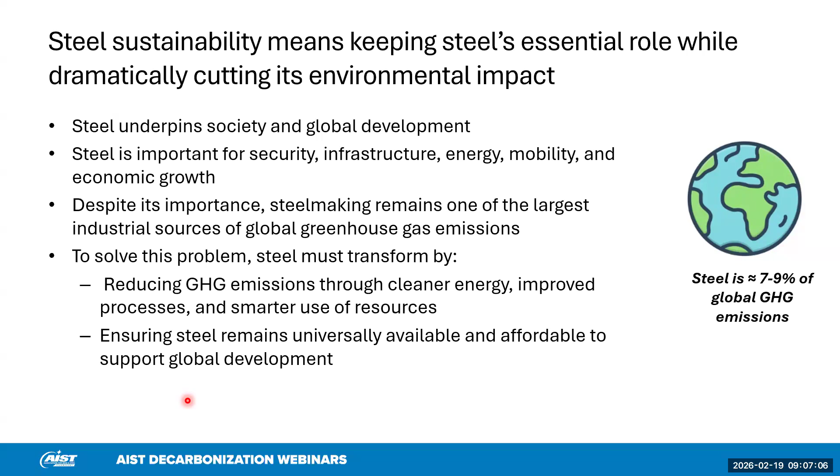So I want to talk just real quick about why steel is foundational. It's for national security—not only for tanks and ships and guns, but all the things that go into national security. It also underpins our entire infrastructure in each and every country.

Bridges, rail systems, and everything that puts things together. It's important for how we get from one place to another, how we ship goods—automotive, trucking, rail logistics, and shipping. None of this could be done without steel.

Steel is also energy. This entire energy transition to try to reduce greenhouse gas emissions is going to be rooted in steel—the foundations, the towers, the piping. Think about all these things going into these projects; it's all rooted in steel.

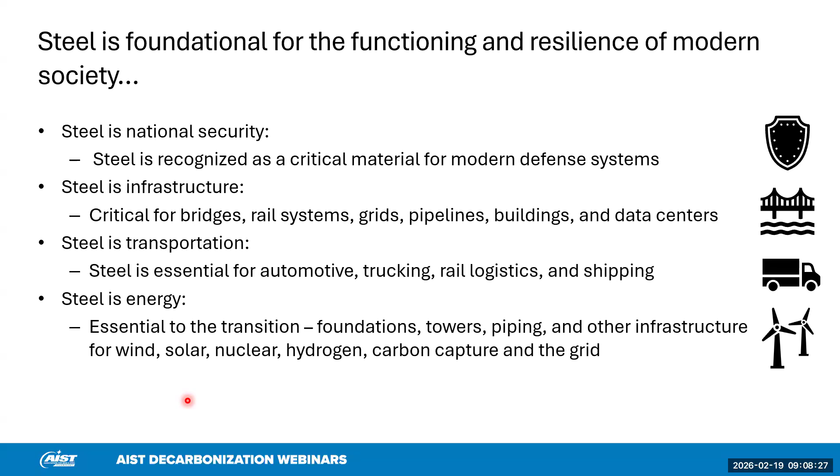And so, yes, we have made progress in reducing greenhouse gas emissions. You can see here, back in 1960 we were at 2.4 tons of CO2 per ton of steel, and we're now all the way down to a little over 1.90.

Some of this was done through sheer economics. Steel scrap became plentiful as our society started recycling, tearing things down, and reusing things. The advent of the EAF really helped drive a lot of this efficiency, and blast furnace and other processes have also become more efficient.

At the same time we improved our greenhouse gas efficiency, the use of steel has actually increased. So now our total emissions have increased dramatically with the usage of steel. The end result is that changing steel efficiency is not enough—we have to dramatically change it.

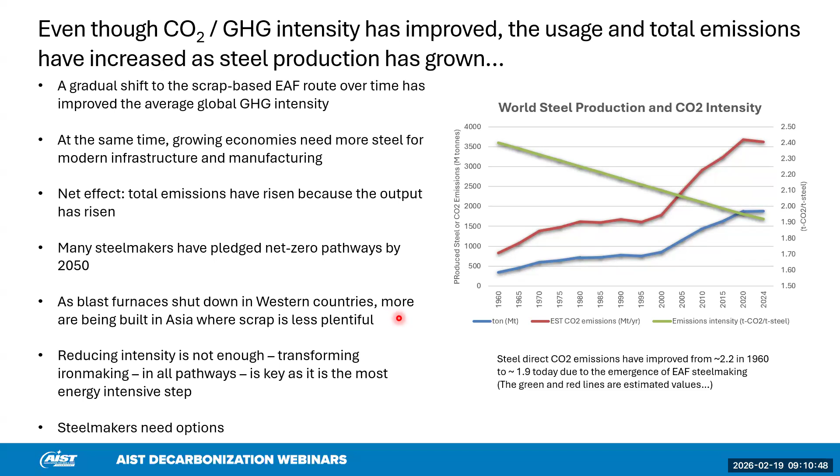Right now, not everybody can go to electricity. As blast furnaces are shut down in Western countries, we're trying to lean on electricity as a potential source of making clean steel. But not all places are able to do that. In Asia, for instance, they rely heavily on coal and scrap is a lot less plentiful there, so they're still building blast furnaces. Steelmakers need options, but we don't need mandates.

Talking again about steel recycling, it's nearly 100% recyclable. You can use a steel beam over and over again, just remelt it and remake it. The fact that steel is magnetic makes it super easy to separate, improving recovery and lowering landfill. In North America, I was really surprised to see we have over an 80% recycling rate—one of the highest of any material. When you recycle steel, you save approximately 74% energy and about 60% of the greenhouse gas emissions.

While recycling is super important, the world still needs clean, high-purity iron units, or we won't be able to make some of the high-quality steels that we want to make.

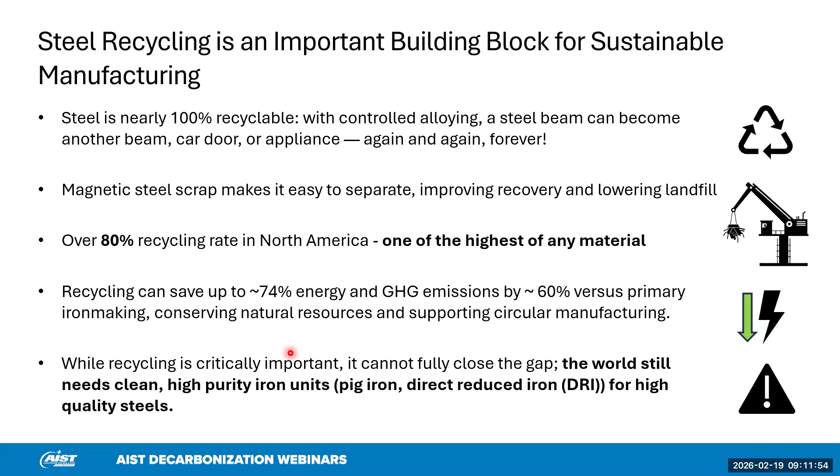Okay, I'm going to transition to the next group and talk about DRI and blast furnaces. These are the two biggest forms of iron making that I mentioned are so critical to reducing the greenhouse gas emissions of steel.

DRI positives: they're typically alloy-free and make efficient use of top gas, much more than iron making. It's 33% lower greenhouse gas when made with natural gas, and you can almost get to zero with hydrogen, especially if renewables are used—and you can export it since it's already in solid form. Although it generally retains oxides, it's harder to melt in the EAF, and it's more expensive without low-priced fuel, so they really rely on that.

Blast furnaces are alloy-free, typically less expensive, easier to melt in solid form, and they automatically remove the gangue, which is an important point. It's hard to export because you need to solidify the iron, and it's generally more capital intensive—so integrated steelmakers have a lot of equipment already on the ground. The big negative is it's higher in greenhouse gas intensity.

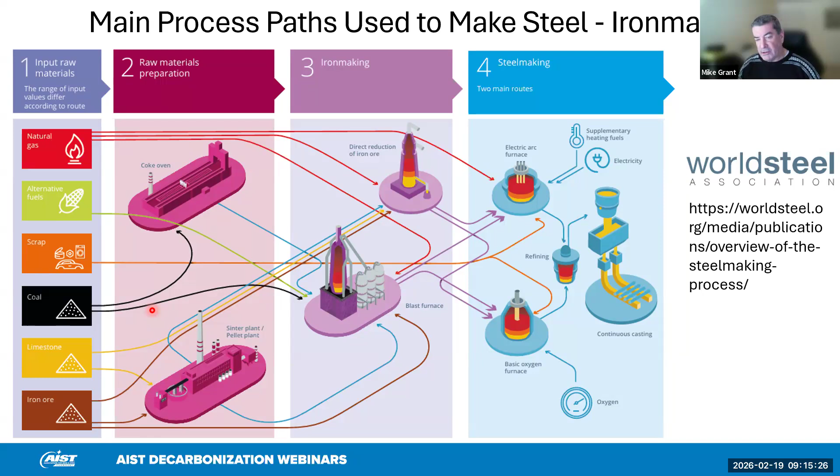I'm going to break this presentation into two forms. I'm going to talk about iron making and give you some background on the way steel is made, as best I can do in 15 minutes. And I'm going to start with iron making.

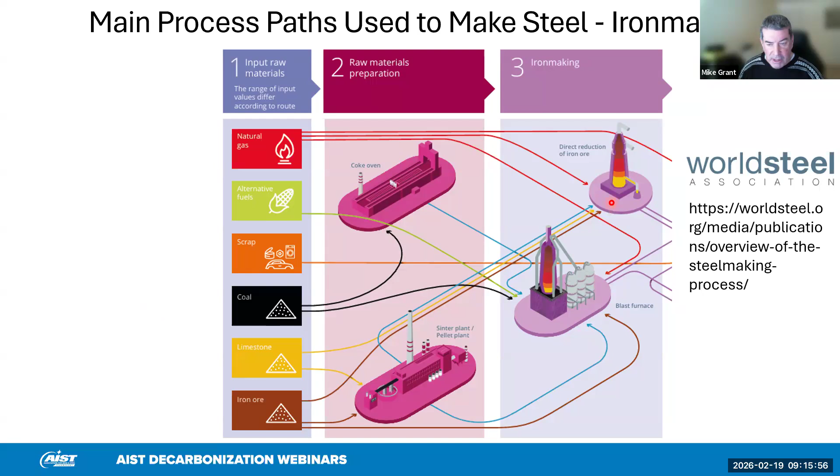Iron making is basically the blast furnace, which is the classical method. It's been made for centuries with a blast furnace. And more recently, direct reduced iron, which is a natural gas based process. Joe introduced those earlier.

So first of all, let's look at the growth of steel production in the world. Up until about 2000, the world produced less than 1 billion tons, around 800 million. Most of that was made with the classical blast furnace, basic oxygen furnace processes.

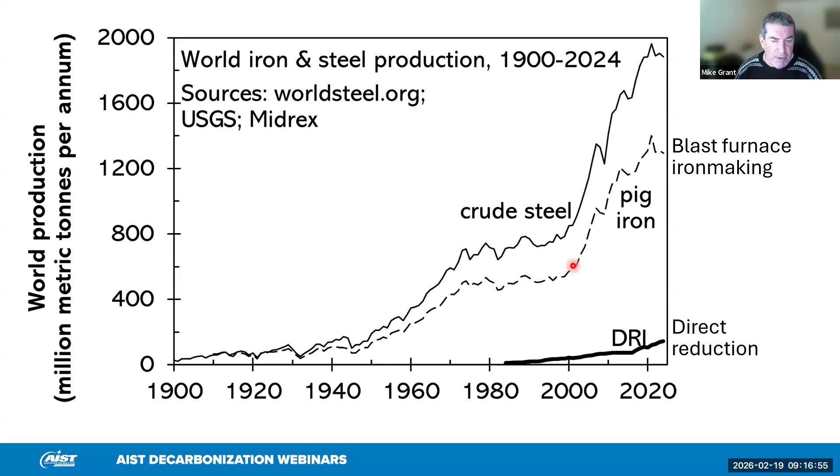In about 1980, a new process was developed, direct reduced iron, primarily gas-based, natural gas-based process. This started to grow because it provided an alternative to steel making in countries where natural gas is relatively inexpensive. But starting around 2000, we saw exponential growth in steel making. Primarily, even though these are the two most emitting processes, the growth was primarily in the blast furnace BOF process.

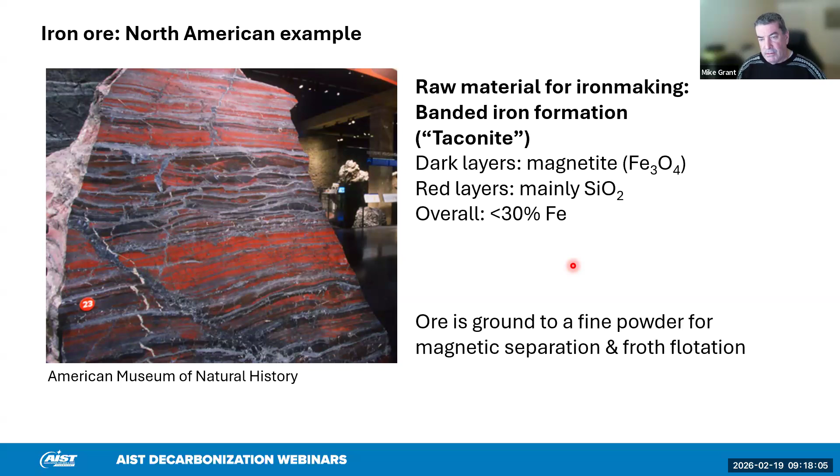Overall, it's about 30% iron content, and we liberate this iron ore by grinding it really fine. By grinding it to very fine particles, we can separate the silicon oxide from the magnetite using magnetic separation. The magnetite is actually magnetic, so it can be picked up with a magnet. And then there are other forms of separation, like froth flotation, a liquid way to separate the different minerals.

If we look at the flow sheet for taconite ore processing, we have grinding and flotation. We separate the valuable magnetite material as best we can. To do this, we have to grind it very fine, around 50 microns. And this, of course, is not suitable for the process.

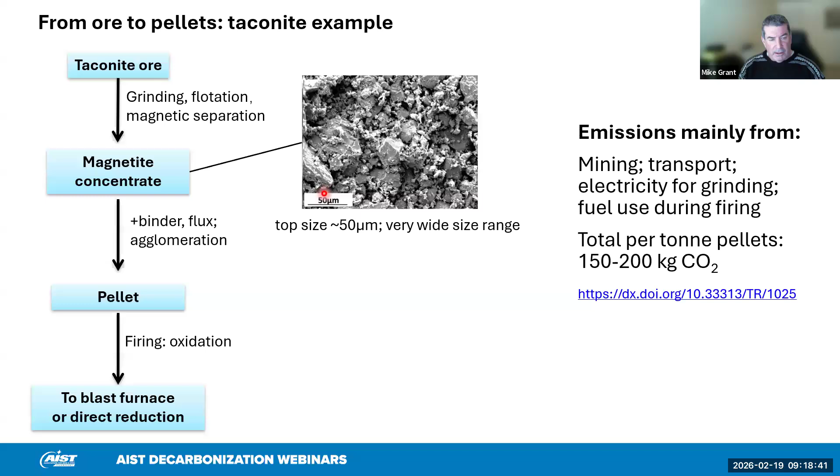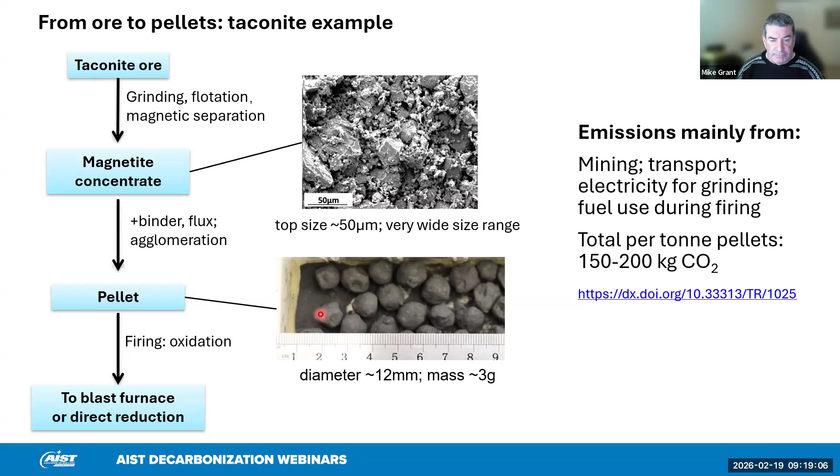So we have to then agglomerate it again. We add a binder, typically a type of clay. We pack it together in little balls, and these become sinter or pellets, as you can see pellets in the photograph here. We need to do this because we need to be able to pass a lot of reducing gas through these particles in the blast furnace or the DRI reactor in order to make the process function.

With these two processes, we can divide the types of CO2 emissions that we're concerned about. Probably you all know these already, but I'll highlight them quickly. Scope 1 are the CO2 emissions directly emitted from the process we're working with - the blast furnace, what comes out the stack, or what comes out the stack of the DRI reactor. Scope 2, if the process consumes electricity, and that electricity is made by burning fossil fuels, that electricity is a source of CO2. We need to add that to Scope 1 emissions to characterize our overall impact on CO2 emissions for the steel process.

Then there are Scope 3 emissions, less clear, but an example would be the emissions created upstream in producing, for example, iron ore pellets or producing coke, assuming that coke is not produced at the steel mill site itself.

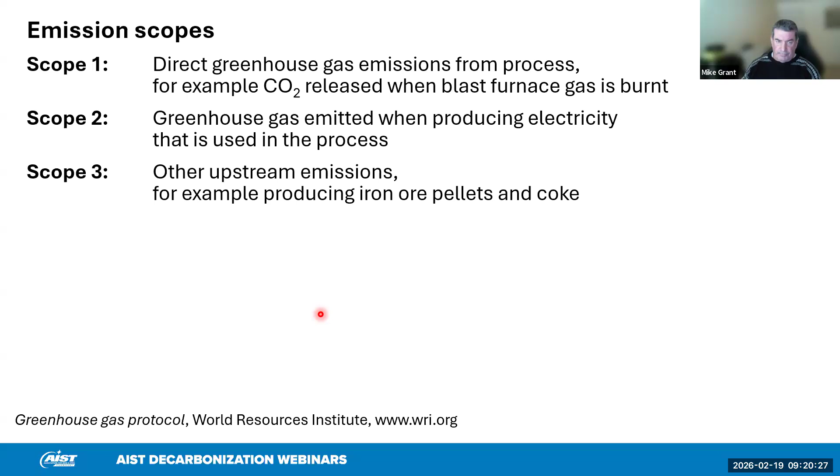This is a basic diagram of a blast furnace. We charge about 1,600 kilograms of pellets, iron ore pellets or sinter, into the top of the furnace, along with some flux to make a slag and about 450 kilograms of coke. These form a packed bed in which we blow gas from the bottom - hot air about 1,300 kilograms and some oxygen, typically averaging about 40 normal cubic meters of oxygen per ton of iron. We blow these in, it burns coke at the bottom, makes carbon monoxide. This carbon monoxide reacts with the iron oxide pellets to produce metallic iron.

The energy consumption of the overall blast furnace process is about 3.6 megawatt hours per ton of hot metal.

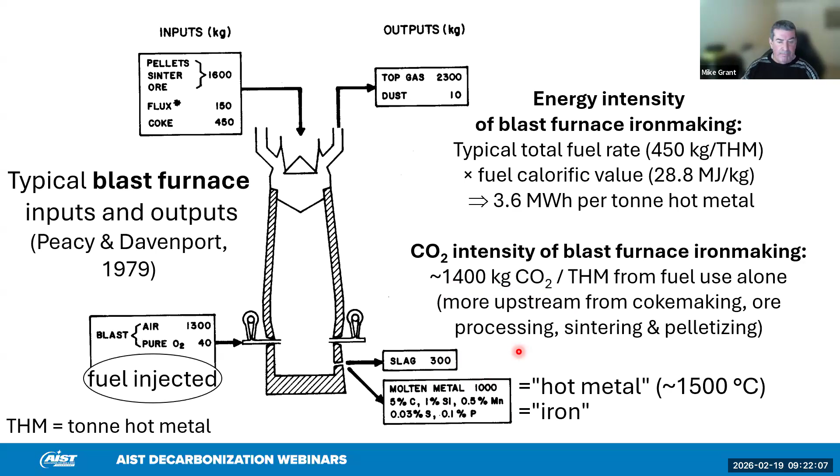The CO2 intensity of this process emits 1,400 to 1,500 kilograms of CO2 per ton of liquid pig iron that is tapped out of the furnace. Therefore, the blast furnace actually produces more mass of CO2 than it does iron. Iron is the product we want to process into steel, and we're making more CO2 than iron. The hot metal comes out at about 1,500 degrees C, along with a slag, which captures many of the impurities like sulfur and other things.

Now this is an example of gas-based direct reduction. There are two types, the Energiron process here, but there's also the Midrex gas-based technology. Both of those rely on natural gas, and natural gas is reformed by reacting. Methane, which natural gas is mostly, is reacted with both water, steam, and CO2 to make our reducing gas. Reducing gas is CO and hydrogen. These react with the iron oxide to produce metallic iron. You can see the two diagrams or two equations here.

A less significant but important reaction is the carburization of the DRI itself. In many cases, the metallic iron reacts with the natural gas itself to produce iron carbide, which provides a useful source of carbon in the DRI product for the electric arc furnace that's going to melt it afterwards.

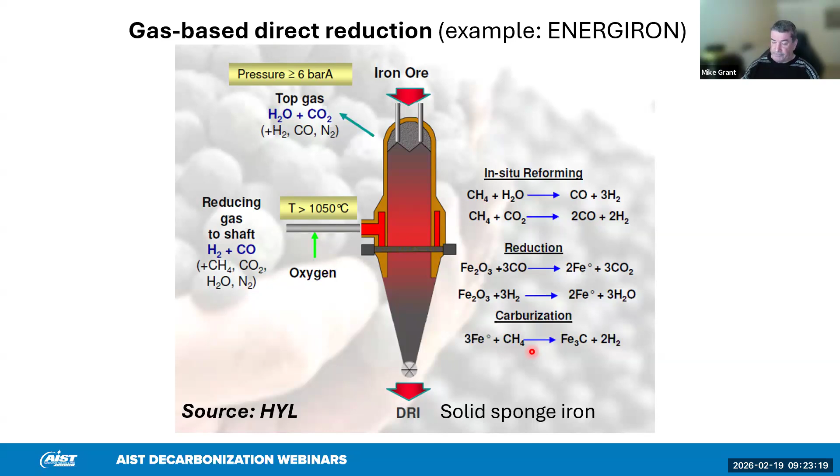Just a very simple mass balance of the DRI process. We're charging in a little less weight of iron ore because it's pure, with less gangue material. We charge about 1.3 tons of iron ore into the top of the DRI reactor. We reform about 190 kilograms of natural gas. We need to power all of this with about 100 kilowatt hours per ton of electricity, and we get about 390 kilograms per ton of... out the top of the DRI reactor.

This produces a DRI with a composition somewhere around 85% metallic iron, and some residual iron oxide, because it's impractical to reduce all of the iron oxide to 100%. A key quality parameter is metallization, defined as the fraction of total iron in the DRI that's in metallic form. This is important because the higher the metallization, the more friendly it is for use in the electric arc furnace, the easier it is to melt, and the less power consumption required.

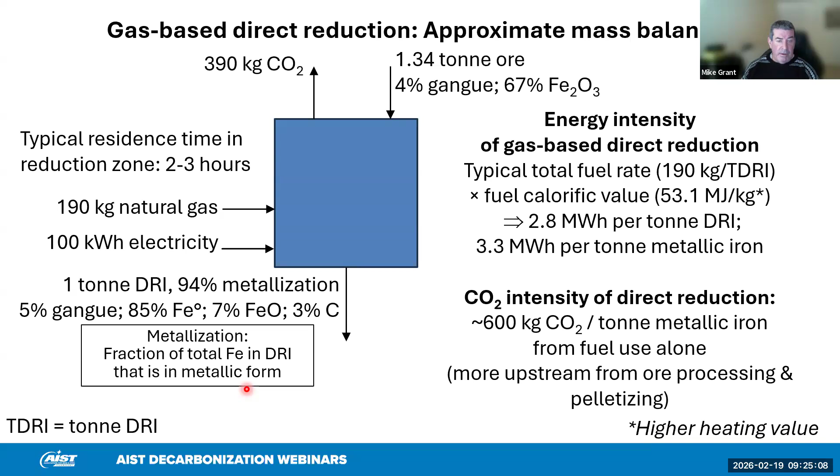The energy consumption for a ton of DRI is somewhere around 2.8 megawatt hours per ton. The CO2 intensity, depending on other factors, the process itself makes around 400 kilograms of CO2. If the electricity and some other products also emit CO2, that can bring the total to more than 600 kilograms of CO2 per ton of metallic iron. So it is a significant source of emissions.

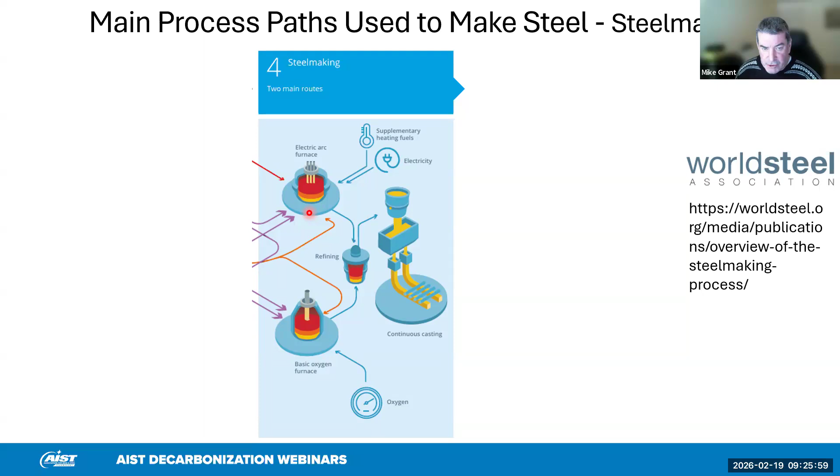BOF steelmaking is the classical example, the primary way of making steel since the 50s. BOF stands for basic oxygen furnace, and in parts of the world like Europe it's often called the LD furnace, standing for Linz-Donawitz, the two cities in Austria where Voestalpine invented the process.

Basically, we're blowing in high velocity oxygen at supersonic speeds to refine a mixture of high carbon liquid metal from 4.5 weight% carbon down to between 0.05 and 1 weight%, blowing this down with oxygen. The charge typically consists of between 75 and 90% liquid pig iron and 10 to 25% scrap.

The primary reactions: carbon in the hot metal from the blast furnace is burned with supersonic oxygen, making CO. That CO is then burned as a fuel with oxygen, primarily in air, to produce CO2, and this is where the emissions come from. We get energy from this reaction with carbon, and we also burn out residual elements such as silicon, manganese, chromium, aluminum, and phosphorus. Combustion of these products produces oxides, which are removed in the slag, and this combustion process gives energy to the process.

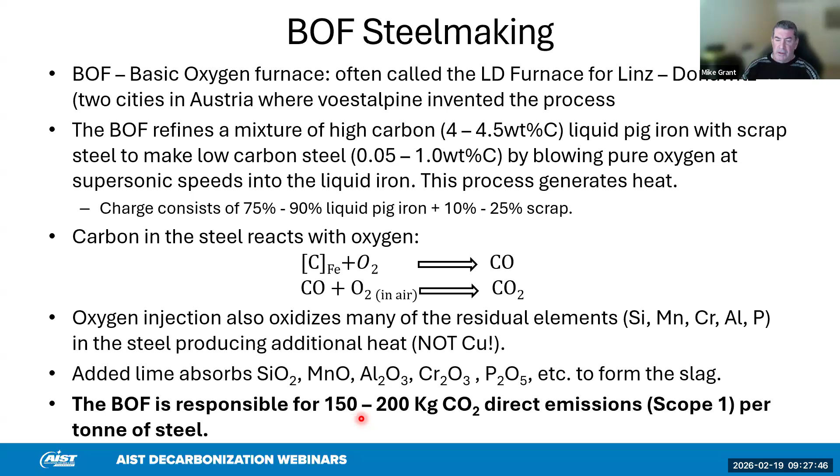In total, BOF is responsible for between 150 and 200 kilograms of direct CO2 emissions, or scope 1 emissions, per ton of steel.

This is a basic oxygen furnace. It's not a really complicated vessel. The scrap and the hot metal are charged into the bottle-like vessel. This lance delivers supersonic oxygen at Mach 2, twice the speed of sound, to vigorously burn out the carbon and residual elements from the process.

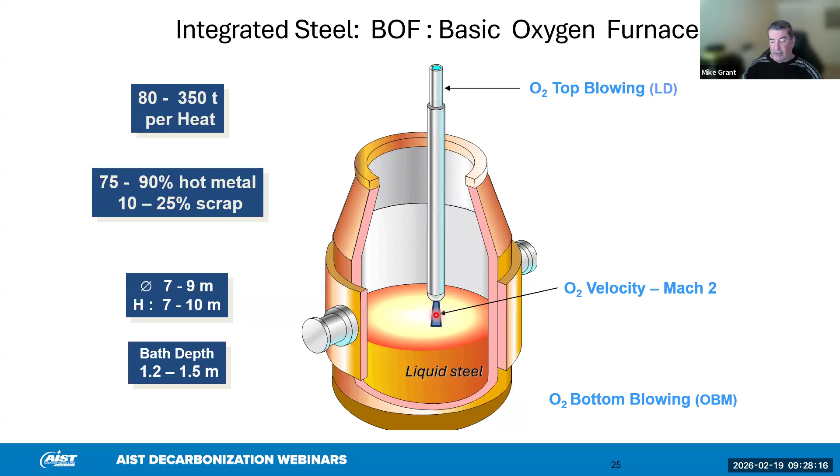So that's the basic oxygen furnace, the classical steelmaking process. Electric arc furnace steelmaking is becoming more and more common, especially because it is much more friendly from a CO2 footprint point of view. In the US, 72% of the steel made is from the electric arc furnace.

It's designed primarily as a scrap recycler. Steel is virtually 100% recyclable, and recycled scrap can be melted and made into new, usable steel. This is done using an electric arc that produces a plasma of roughly 10,000 degrees C, rapidly melting the scrap into liquid steel, using more than 100 megawatts for a typical 150-ton batch of steel. This power is delivered through graphite electrodes into the bath.

When we need higher quality steel, we dilute the impurities. Scrap has a lot of impurities, which we dilute with so-called virgin pig iron, which is DRI, or sometimes solid pig iron from the blast furnace. This pure iron is charged to dilute the impurities from scrap, and can be charged in quantities up to 50%.

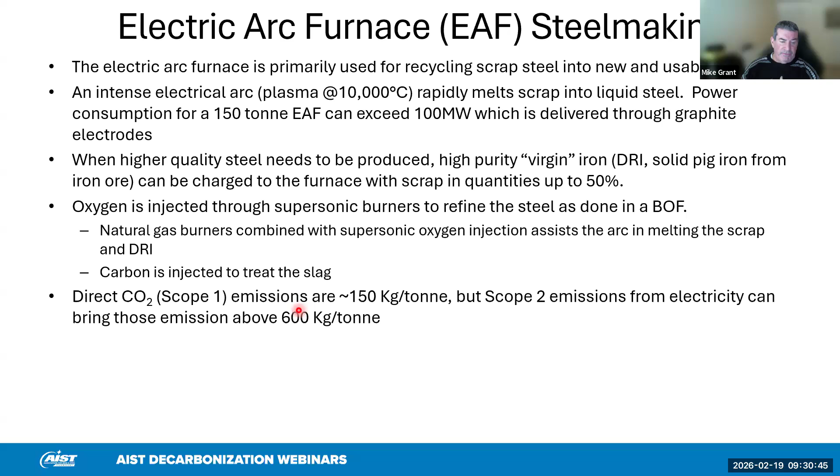Just a quick energy balance. We categorize the electric arc furnace by how much power it uses. A typical electrical energy consumption is about 450 kilowatt hours per ton, and this amount determines the productivity of the electric arc furnace - how fast we can deliver that electricity determines the speed at which we can produce a batch of steel.

Other energy contributors are the reactions involving oxygen. All of these impurities burned out of the steel during processing produce energy. The bath reactions contribute almost 100 kilowatt hours per ton. Burners could contribute 50 kilowatt hours per ton, and some other reactions too - these contributions are denoted by a negative sign to show they are energy contributions. So we're delivering 450 kilowatt hours per ton of electrical energy.

47% of the total input is actually chemical energy from all of these reactions that take place. So it's called an electric arc furnace, but the chemical energy delivered plays a key role in production, and the total energy could be, in this case, 850 kilowatt hours of total energy per ton of steel.

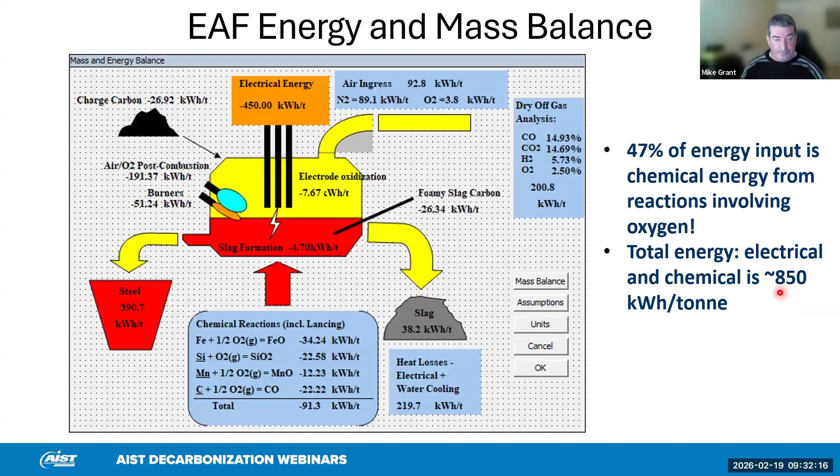This concludes my presentation. I hope this brief description helped you understand the process better. Thank you very much.

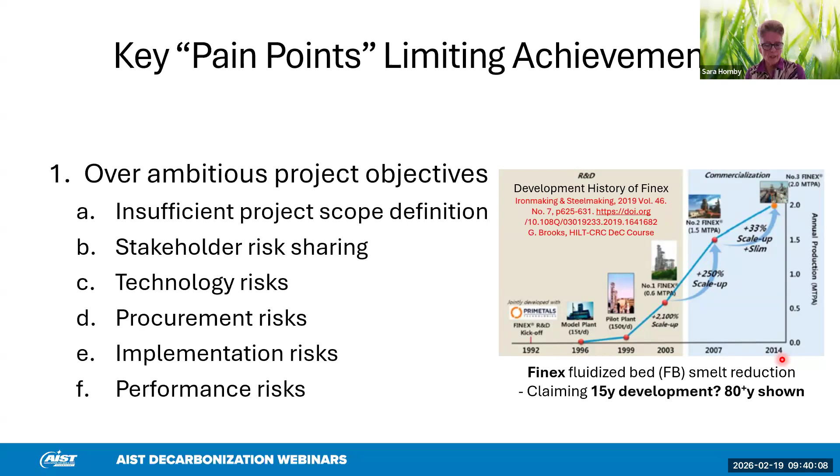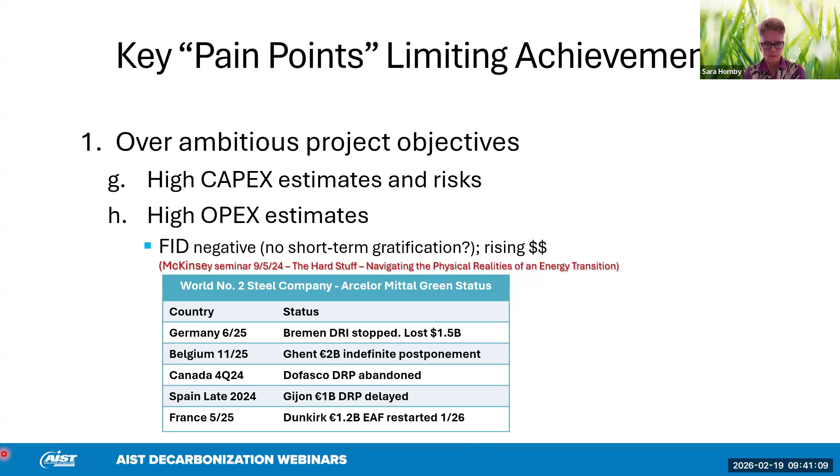Come on. There we go. Sorry about the lag in the slide motion.

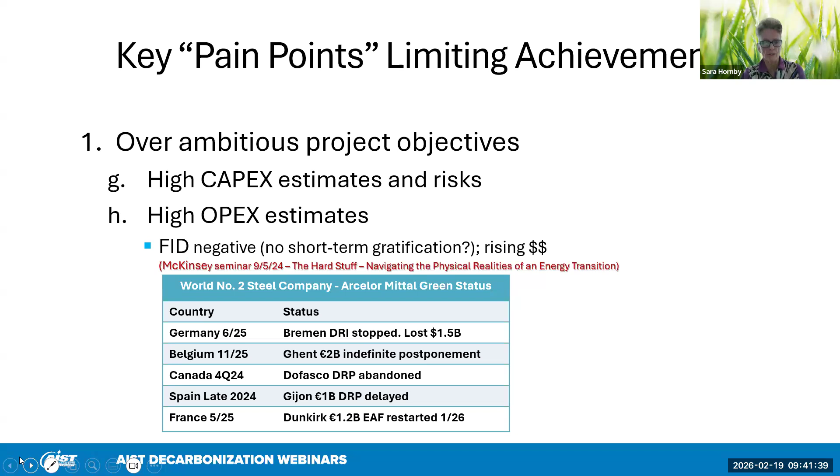Some of the examples down here, this chart shows ArcelorMittal, the second largest steelmaker in the world. Basically 4 out of these 5 projects enumerated here have either stopped, been postponed, been abandoned, or delayed for a significant amount of time. The one that now is going ahead is the one in France, in Dunkirk. They've just announced the restart of that project.

The second point is access to electrical power. Insufficient short-term access to required low-cost renewable energy is an obvious issue. You can see from the chart on the right-hand side, the target for 2030 is over 11 terawatts, and currently in 2024 we were only producing about 4.5 terawatts. The yellow here represents solar energy, which is predominant in the new energy capacity coming online, but that's also going to depend on location.

The lack of renewable energy is going to make it difficult to obtain the quantities required as we convert to electrification for either electric arc furnaces or other systems, obtaining that from the grid. There are high costs and complexities in terms of building large solar, wind, or even nuclear SMRs as power systems, and you've got to consider their associated battery storage and distribution networks that would need to be close to the steel mills.

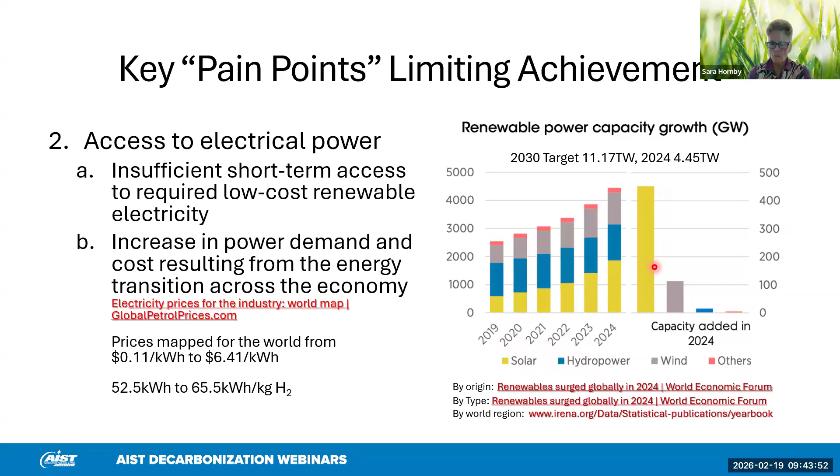Number 3 is the different and changing government, environmental, and trade policies between regions. Many of our steelmakers today are international, with a global presence, so government policies in different regions have a significant impact on making a comparative assessment between investment options. All these policies have been seen to change partway through a project, which generates risks in terms of business viability. The fourth one is the lack of harmonization of the carbon accounting system.

Without standardized carbon accounting, it's difficult to compare performance and demonstrate any progress that's occurring. This can complicate reporting and undermine stakeholder confidence.

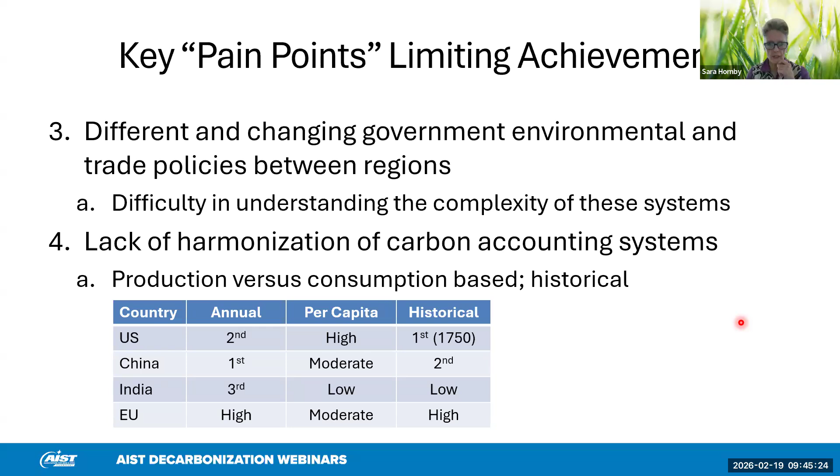I put in a little table at the bottom that shows the difference between annual carbon footprint per capita and historical. If you look at annual CO2 per tons produced, the Chinese, at 54% of the world's steel, are way ahead of the US in second place. If you look at per capita, the US is high because its population is way less than the Asian nations. And historically, if you look at the generation of CO2 greenhouse gases, the US is way out ahead because we've been tracking it since 1750, and we were ahead of the game in terms of the Industrial Revolution.

Apart from cheap natural gas being a viable option for DRI production, Argentina, for example, has a low availability of good scrap. So a lot of their steel is produced based on up to 100% of DRI in the electric arc furnaces.

Another big issue is the limited market demand for premium priced green steel. Mills really require 200 to 300 euros to validate the expense of the projects, and they may concede 20 to 30 euros of that. But clients appear only to be prepared to pay 100 to 150 euros per ton for green steel. This pricing barrier is going to challenge widespread adoption of green steel ultimately.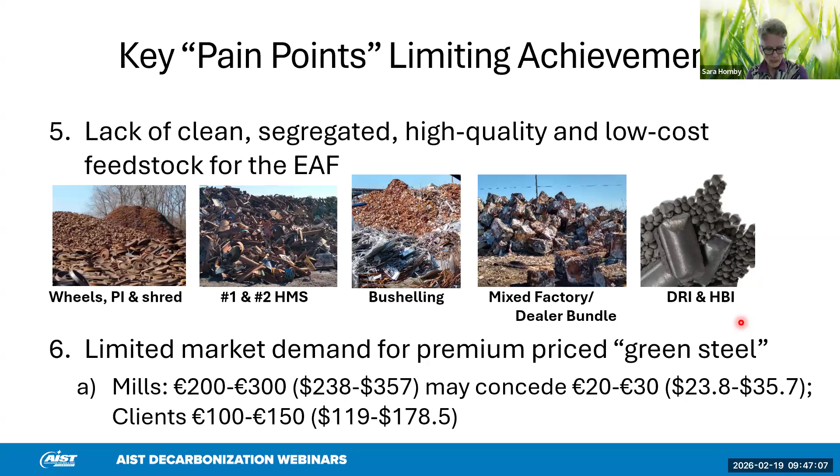Carbon-free hydrogen is required to stabilize the CO2. And sequestration requires caverns that are semi-reactive to bind the CO2, and those are not available everywhere throughout the world. So CCUS being the be-all and end-all of the excess CO2 not taken care of from electrification and hydrogen decarbonization solutions still remains a question mark for the future.

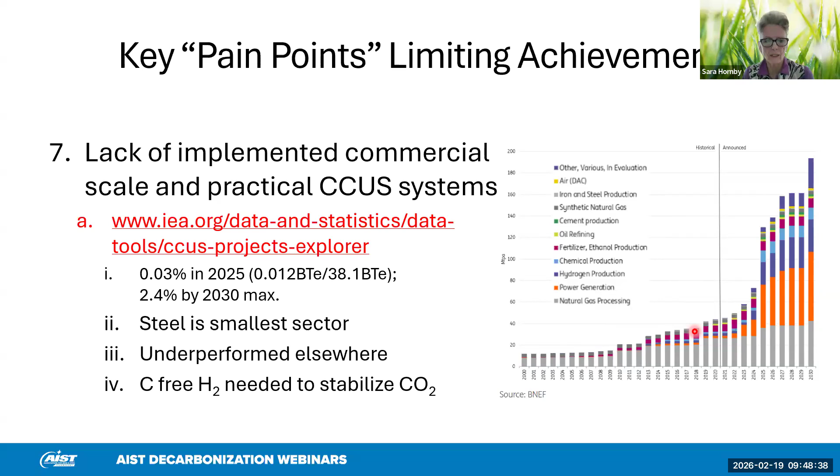And with that, I'll pass it back to David, and thank you for your attention.

Thanks, Sara and Ian, for a great presentation. So now we know that an industry that's already fighting instability and cycles in its product pricing and its raw materials and electrical pricing now has to go and spend billions with all the challenges that involves.

So our final section will, after all of this, ask what does the future look like. This section was prepared by Chris Pistorius, Joe Morey, Brian Black, Ian Sutherland and Rick McKinnon. It'll talk about what the future looks like in different regions. Go ahead, Chris, please.

All right, thank you very much. Given the sobering context that Sara outlined, I do want to outline some of the existing possibilities which are already implemented and close to implementation, and some that are a bit further out to decarbonize both ironmaking and steelmaking. As you see, I shall talk about existing technologies, and scope for improving those and increasing their implementation.

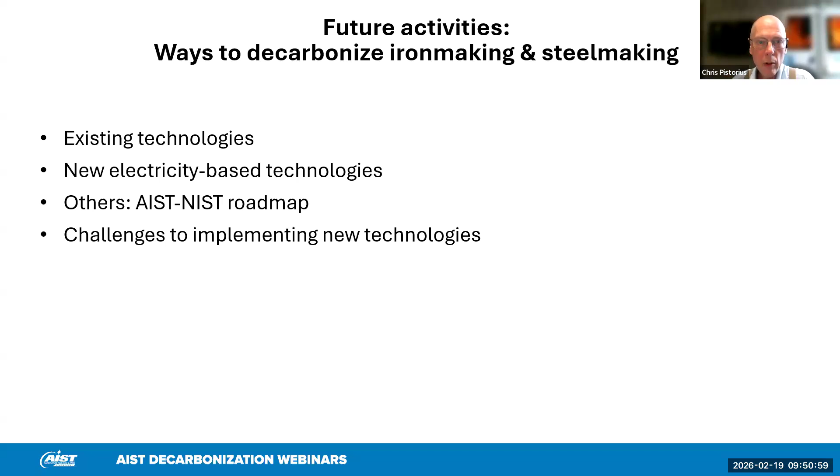And then I shall circle back to some of the challenges that Sara mentioned and use, I think, a very useful, sane way of analyzing these that Hatch has distributed for several of the projects.

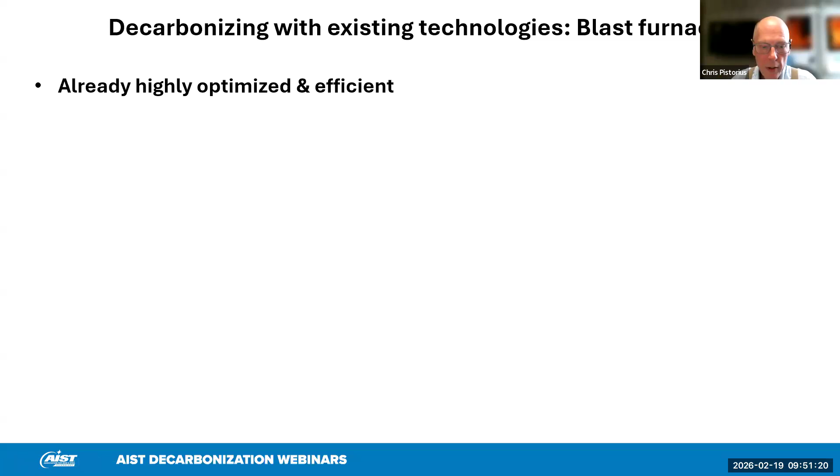So first, talking about the blast furnace, the technology is already highly optimized because coke, the main source of CO2 in the process, is an expensive input. So historically, there has been a real drive to decrease the coke rate.

But there are things we can do to get that even lower. Some of the things already done is to partially replace the coke with other fuels, typically injected through the tuyeres. Highly established approaches are to use pulverized coal - that doesn't really change the carbon intensity, but injecting natural gas and coke oven gas can decrease the carbon intensity a little bit.

The ultimate aim possibly is to use much more hydrogen. It's a little bit limited in terms of the amount that you can actually inject without upsetting the temperature balance in the furnace.

Something that has much more scope, I think, is something that's done already, which is to change from feeding iron ore to partially feeding scrap or other sources of iron, reverts. For every 10% of the iron that's in metallic form, the coke rate drops by 7%. And there's a productivity increase, which allows some companies to close smaller, arguably less efficient blast furnaces and use a bigger furnace with iron input to run at a higher productivity.

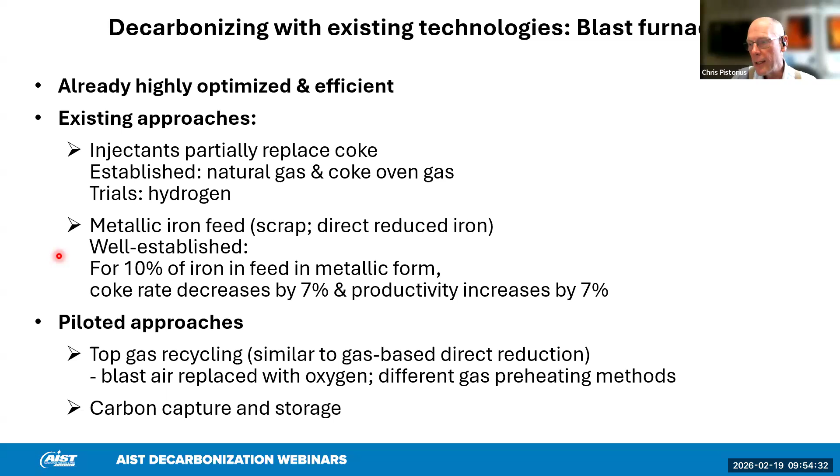And then, as Sara mentioned, carbon capture has been piloted, hasn't been implemented at a large scale, but still has some scope from a cost point of view. It seems attractive, although in the absence of a large-scale demonstration, one doesn't really know what the true cost will be.

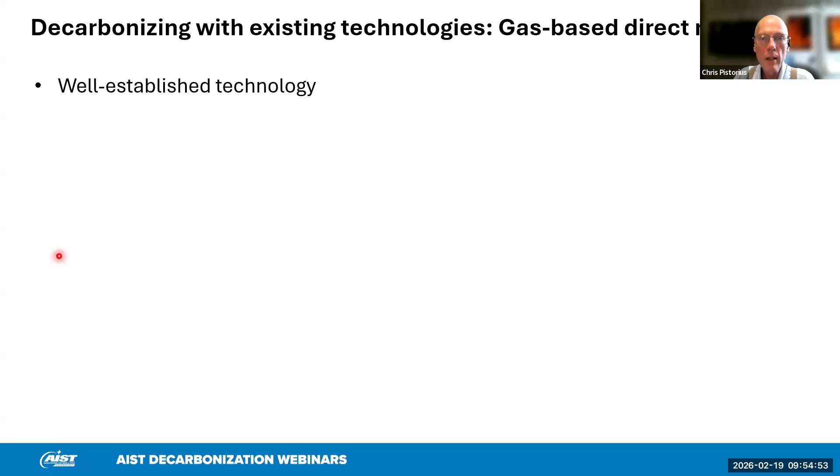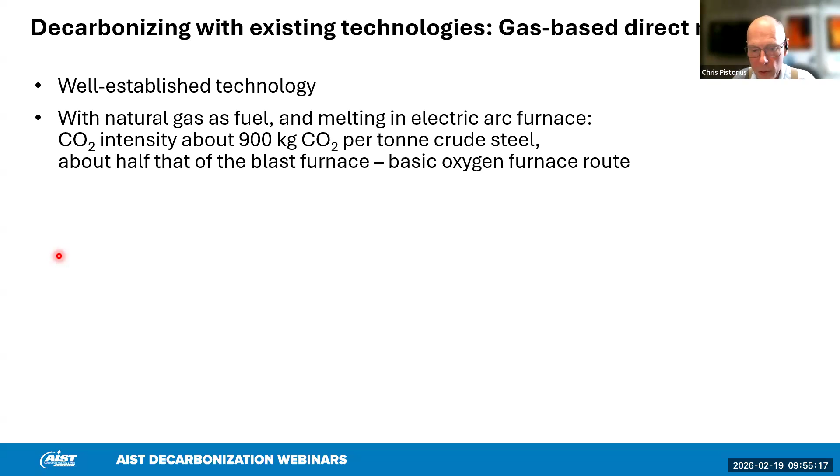The other existing technology that already reduces the carbon footprint of iron making by about half compared with blast furnace BOF operations is gas-based direct reduction. That is well established - we saw the production numbers earlier. And if you add in the consumption at the electric arc furnace, the total intensity per ton of crude steel is about half that of the blast furnace, excluding some of the Scope 3 emissions from pelletizing.

And there is the option to transition from natural gas to hydrogen. It's not a big change to the process. This has been piloted at large scale quite successfully under the HYBRIT program, especially in Sweden. And the first major plant using pure hydrogen produced on site will be Stegra in Sweden, expected to start up parts of their operation later this year already.

One of the potential issues with using more and more direct reduced iron in steelmaking is the quality of the feed. The gangue is not removed in the iron making process if you're doing direct reduction, because it's all in a solid state. This is in contrast with the blast furnace, which melts everything, so the impurities are taken out as a slag. In DRI, the gangue is instead removed as a slag in the later steelmaking step in the electric arc furnace.

And there are existing operations that run on 100% DRI, no problem. But if the gangue content increases, that slag volume can become problematic. The current idea is to use a different melting unit, a so-called electric smelting furnace, which kind of mimics the lower part of the blast furnace, using electrical energy to produce something like hot metal and slag, which can be used in cement production, and then use that iron either in an electric arc furnace or in a classic basic oxygen furnace.

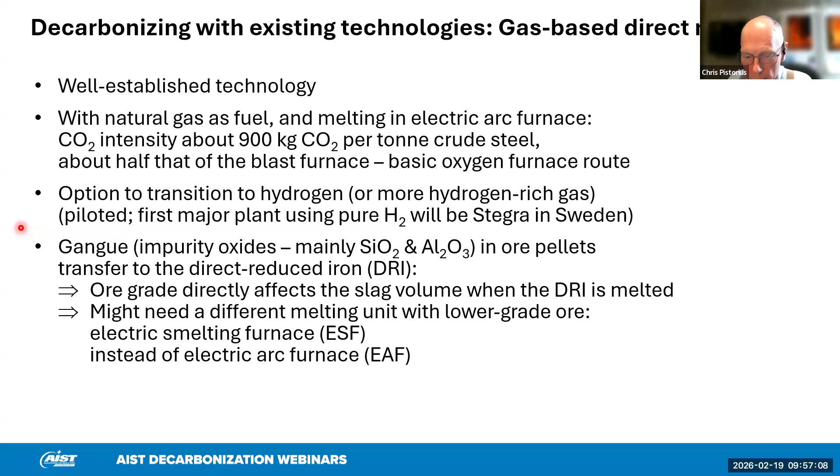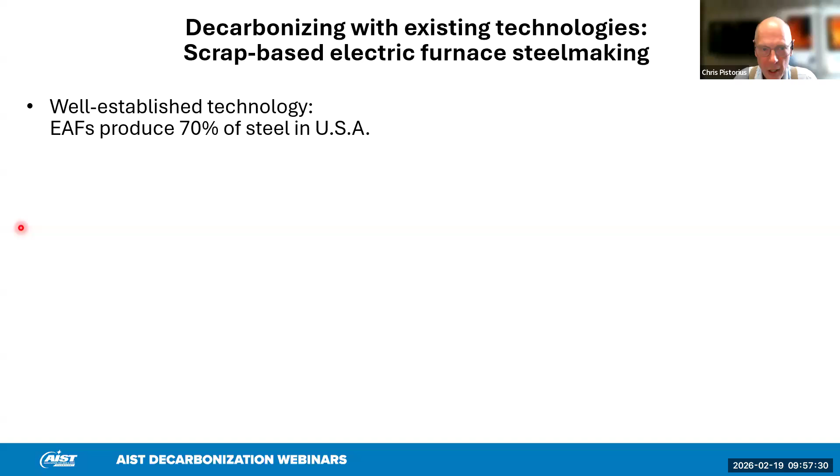And then in terms of steelmaking, electric furnace steelmaking is of course a very well-established technology. It is older than BOF steelmaking by half a century - it's been around a long time. It's used to make 70% of the steel in the US. And because we mostly remelt iron, inherently the energy intensity is much lower than that of the iron making processes, coming out to be around 400 kilowatt hours per ton of steel.

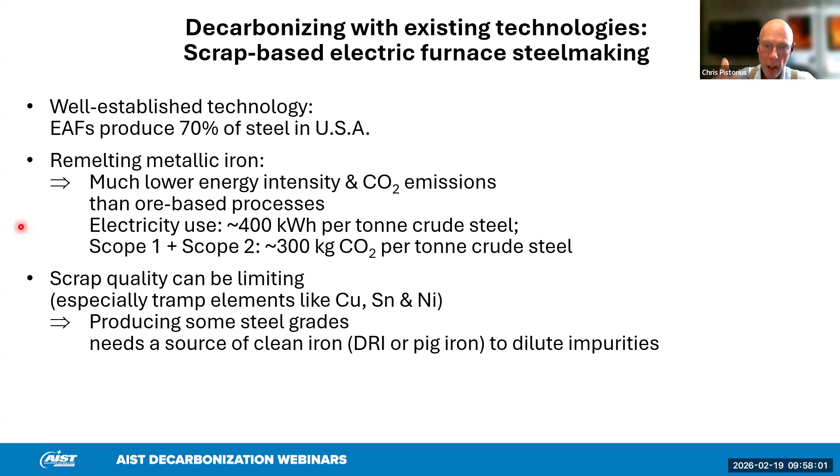Scrap quality is really important, especially tramp elements like copper, tin, and nickel, which build up in the scrap pool as we keep on recycling the steel. For some steel grades this matters less, but others are very sensitive to copper and tin especially, so one does need a source of clean iron to dilute the impurities.

Ultimately, one needs to combine this with a source of low carbon electricity to have both low Scope 1 and Scope 2 emissions. That can then get this number of 300 kilograms down to essentially zero, depending on what sources of carbon one uses in the electric arc furnace.

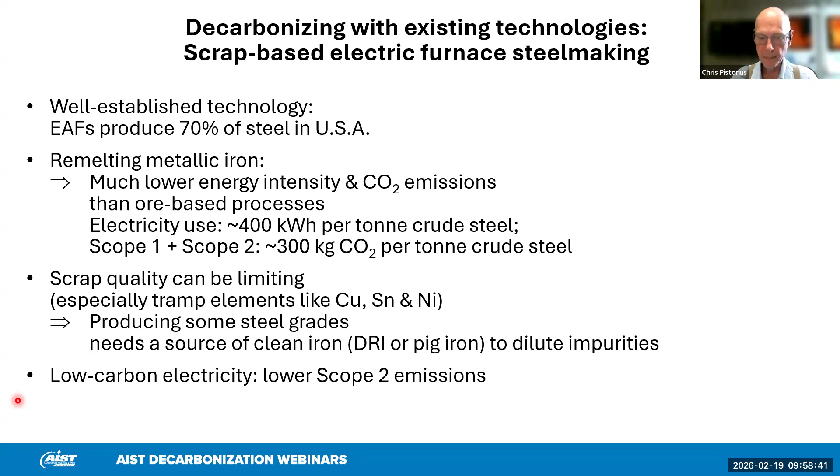So as a summary of what one can achieve with existing technologies, there are plants doing this already that are running profitably, except for the last one, which will be running soon. This is compared with a baseline blast furnace BOF route, around, depending on what one includes, 1,500 kilograms of CO2 per ton of steel.

If one maximizes natural gas injection you can decrease that a little bit. In part that's because one needs more oxygen enrichment, and producing oxygen isn't necessarily carbon-free.

If you charge the maximal amount of metallic iron you can, that really decreases the CO2 emissions substantially. This includes the CO2 emissions from making DRI using natural gas.

The DRI-EAF route, again, there are plants doing this currently—that's around 900. If you use renewable electricity, one cuts out around 140 kilograms. If you use scrap, we're at around 300.

If you use renewable electricity again, you halve that approximately. And ultimately, if one uses hydrogen DRI in an EAF with biocarbon and renewable electricity, it's very close to zero—there's a little bit of carbon for arguably carburization of the material needed. So these are using existing technology, and a tweak on existing technology in the last case.

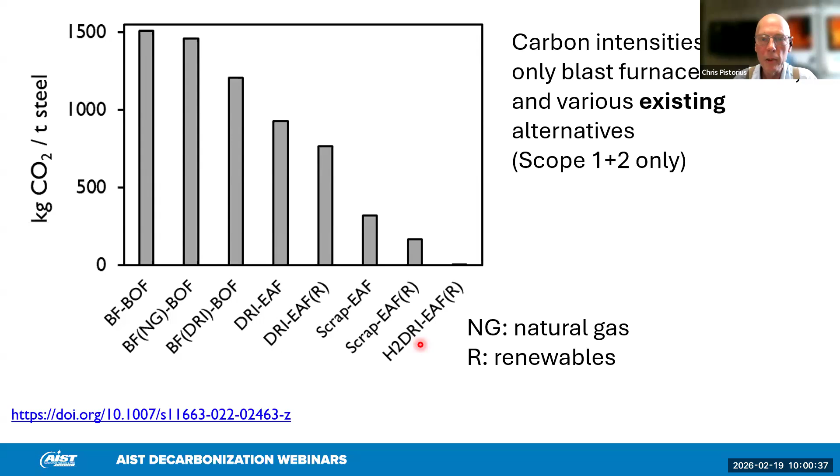There is a real spectrum of possibilities available, and just to emphasize that this is real—this is the Rocky Mountain steel mills in Pueblo, Colorado.

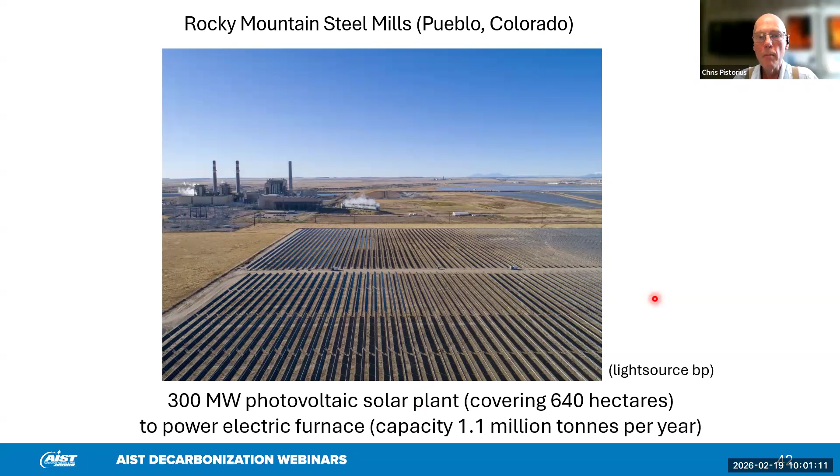What you see in the front is the 300 megawatt photovoltaic solar plant that produces the power to make around 1.1 million tons of steel per year. There are a couple more examples of this going up around the US. Not all of them have the production exactly next to the plant, but they use renewable electricity.

In my last 10 minutes, I'll talk a little bit about some of the new technologies, where they are, and what their typical numbers are. The first of these is the tweak on existing technology, which uses hydrogen instead of natural gas in direct reduction. There's high temperature electrolysis as an option, and also low temperature electrolysis—both of these are being piloted.

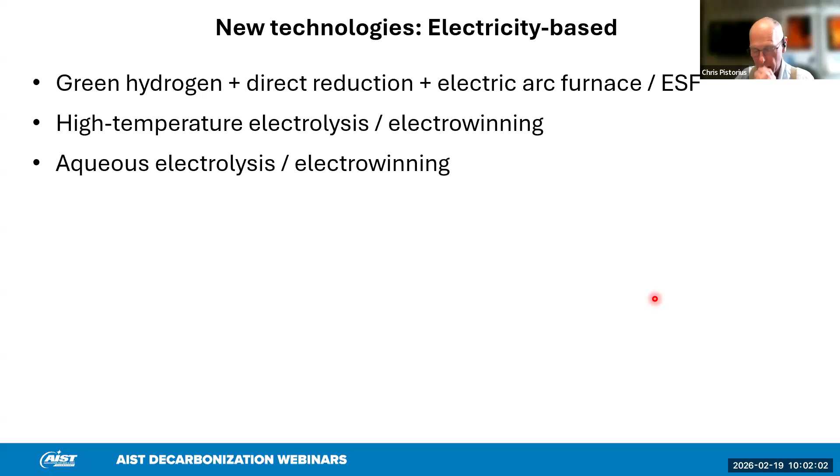As context to this, some numbers about how low we can expect the energy requirement to go for any of these processes. The important number here is the baseline: what energy do we need to break the bonds between iron and oxygen in our raw material, which is typically Fe2O3, or hematite.

All of these processes, ultimately, if you draw a boundary around the whole plant, you get hematite in, you get iron out, and you get oxygen as a byproduct. This reaction is what is being done in all three of these electricity-based examples.

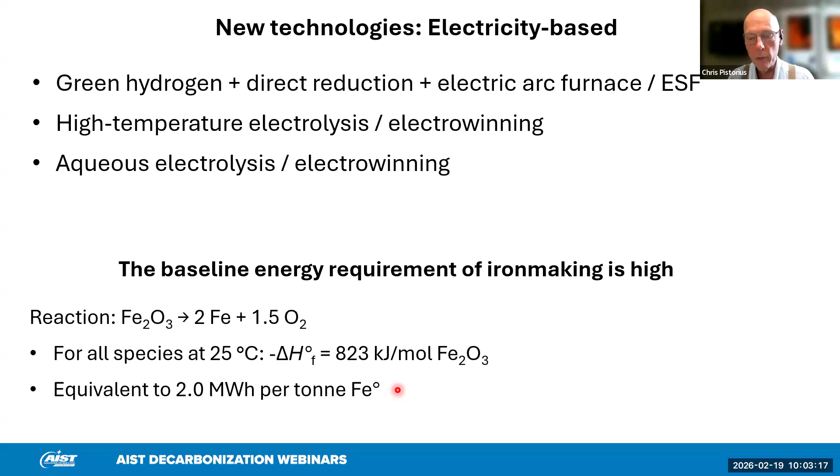So we need to provide at least that energy, and that turns out to be around 2 megawatt hours per ton of iron—2,000 kilowatt hours per ton of iron, about 5 times what we use in an electric arc furnace. As we shall see, when we add in the other things we need around the plant, the typical number ends up around twice this, 4,000 kilowatt hours per ton of metallic iron, or roughly per ton of crude steel. So it will require a large amount of electricity, as Sarah pointed out.

Here is one such instance. This is very roughly the HYBRIT or Stegra type process, where we use hydrogen to make DRI, which is ideally transferred hot to an electric arc furnace, or if it's higher gangue material, an electric smelter furnace, to make crude steel.

The numbers, as shown in the top right, add up to around 4 megawatt hours per ton of crude steel. Those numbers come from what you need to produce the hydrogen. I have a slightly more optimistic number than Sarah's, but it's somewhere around 50 to 60 kilowatt hours per kilogram of hydrogen. Of course we need stoichiometrically around 55 kilograms of hydrogen, so if you multiply those two numbers you're already over 2.5 megawatt hours per ton.

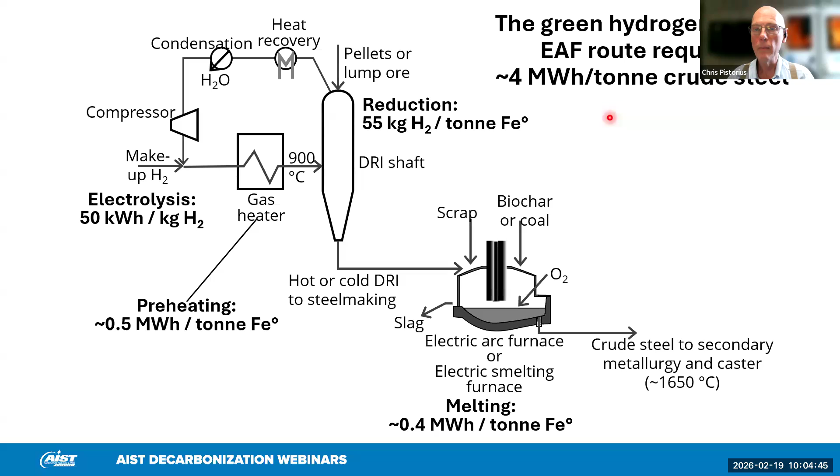Then a substantial electricity requirement is to preheat the gas, because this is how we get the energy for the reduction reactions and to heat up the product. And then we need the normal steelmaking number. If you add all of these together, they come close to 4 megawatt hours per ton of crude steel—a combination of existing processes about to be industrialized, so very high on the technological readiness level.

The other two that I'll mention are not as far along, but are being piloted at large scale. The high temperature one is the one developed by Boston Metal, which feeds ore into a bath of slag, which is also the electrolyte in the process, and then produces iron at the cathode.

This has been very well demonstrated at lab scale and at large pilot scale. The crucial part of this technology is the inert anode, which, at least in the published documents, is a high chromium with a bit of iron alloy, which has really unusual properties to help it withstand the conditions. And that's really of course the innovative part of the process, and the only part that doesn't strongly rely on existing technology.

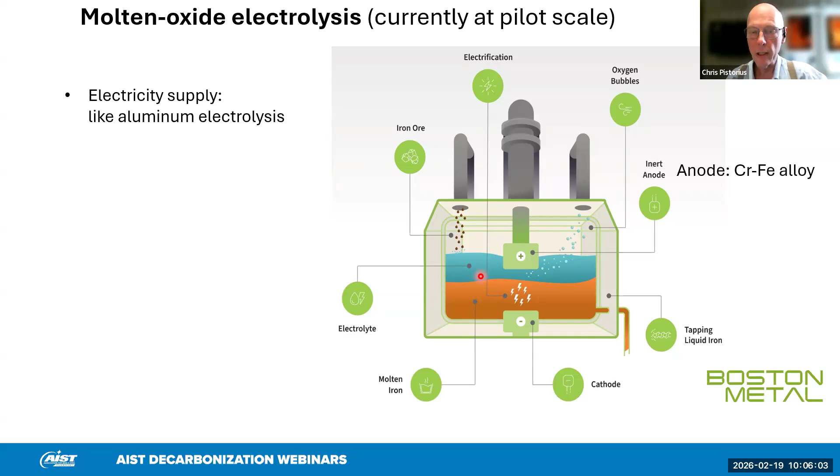The electricity supply will be like aluminum electrolysis. The refining after tapping will be normal ladle metallurgy, well established. And the refractory for this vessel will take normal refractories, because one can tweak the slag to both balance the electricity conduction through it, as well as the compatibility between the slag and the refractory.

If you add up all the numbers with no heat losses, the total is around 3 megawatt hours per ton. So it makes sense that the total will be around 4.

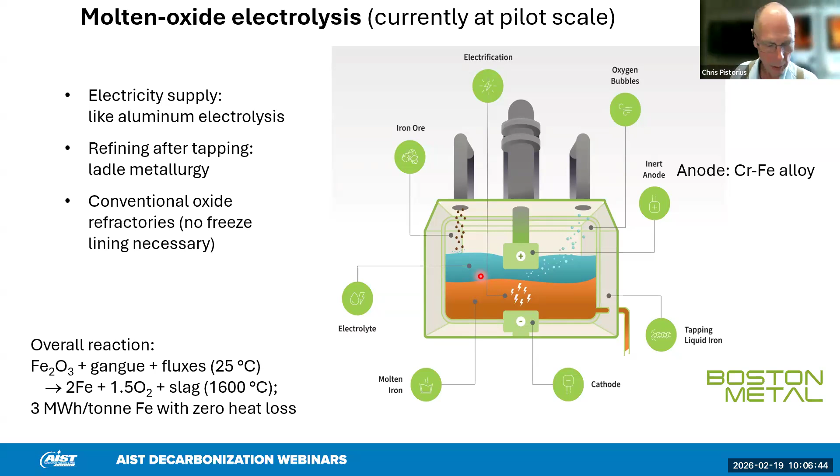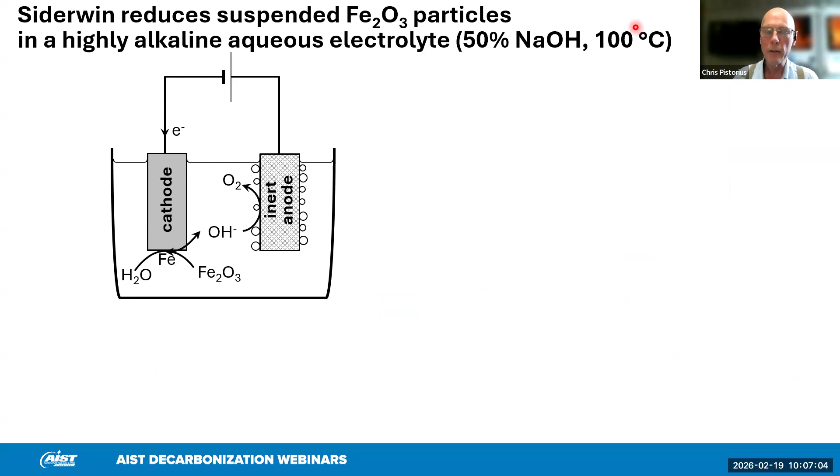There are a couple of low temperature processes that I'll briefly mention. There's one that was developed as part of the European ULCOS program, Siderwin, which runs at modest temperatures, 100 degrees Celsius, very alkaline solution. The iron stays solid. So interestingly, this is a solid state reduction process where the iron grows as these dendritic growths into the existing iron oxide. So any gangue, of course, will be kept in the material.

And it's run at numbers like 2.6 megawatt hours per ton of iron at large lab scale. And this is about to be demonstrated in a plant called Volteron that is due to start next year.

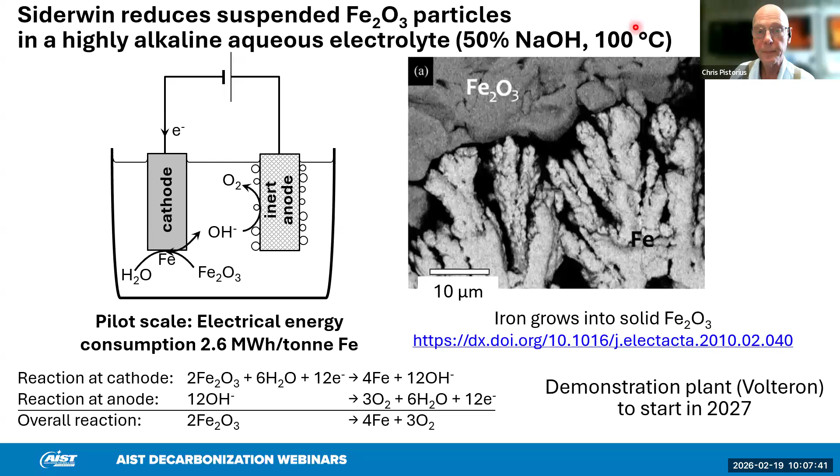The alternative process developed here in the US is the one of Electra, which dissolves the feed material in acid, so somewhat classic hydrometallurgy, and then uses large-scale electrolysis to produce cathodic iron, which then is a very clean feed material that can be used in normal electric furnace steelmaking. In fact, it's a good material for specialty steels as well. Again, it's being run at large pilot scale and being scaled up soon.

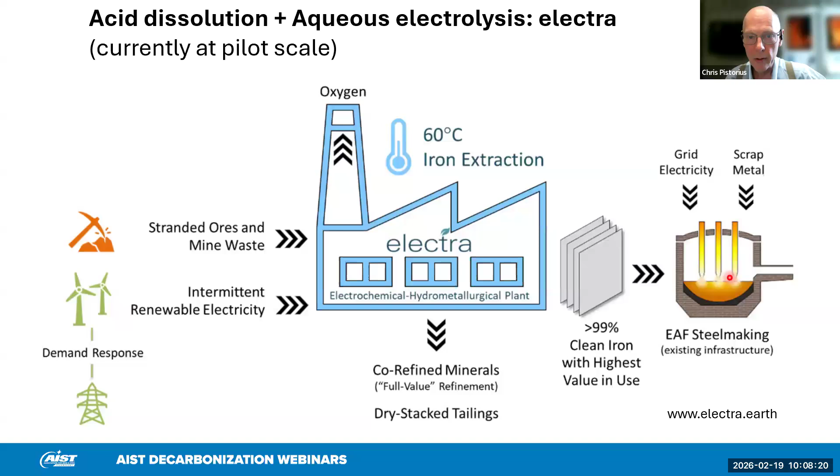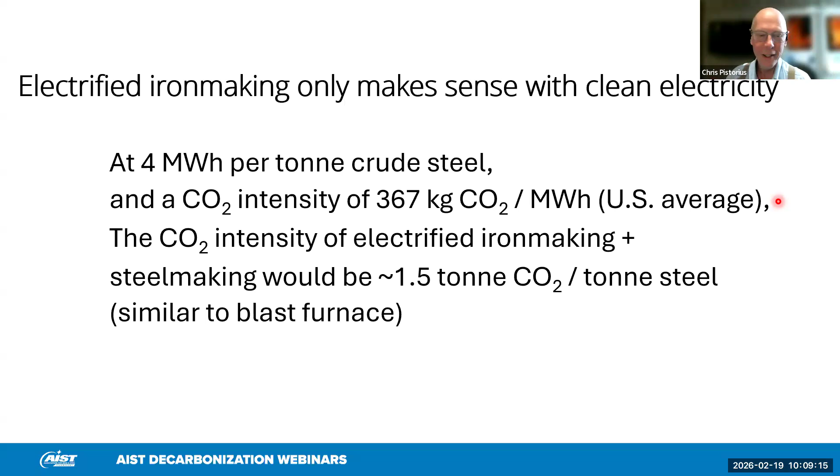So all of these, the numbers add up to around 4 megawatt hours per ton. And just to emphasize that we need clean electricity for this to make any sense at all. It needs to be essentially zero carbon electricity. Because if we take the US average CO2 intensity, of course it varies with season, but around 360, 370 kilograms of CO2 per megawatt hour. If you multiply those two numbers, then we are back at 1.5 tons of CO2 per ton of steel. If we just connected one of these plants to normal grid electricity, we would be back at a blast furnace. So we really do need large amounts of very low carbon electricity at low cost. So that will undoubtedly be a challenge.

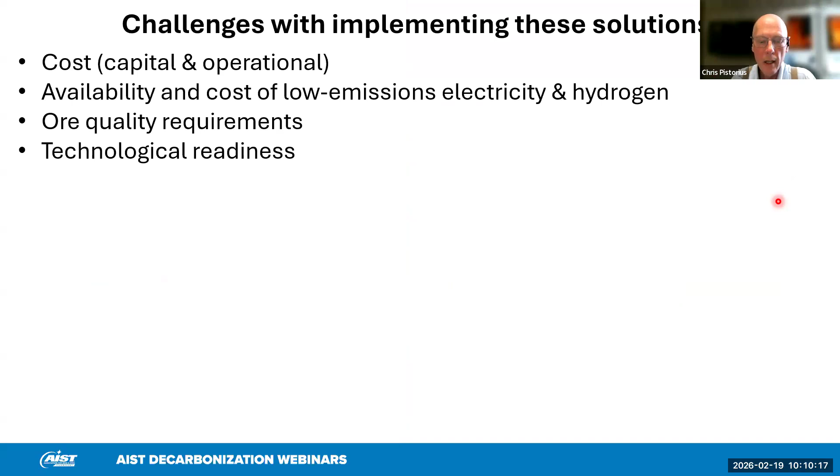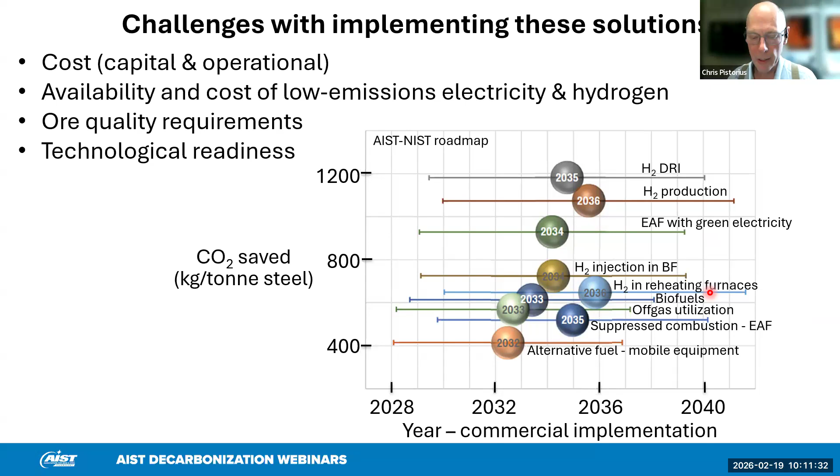So just one additional point, which is the framework that Hatch developed, which is, I think, very useful to understand what makes for a successful implementation.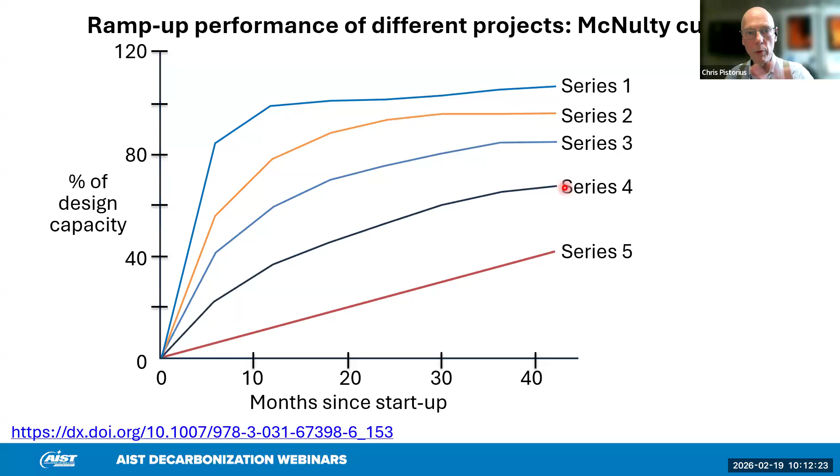So these are the so-called McNulty curves. What's plotted here is the percentage of design capacity of the plant achieved up to about 4 years from startup. These different series refer to specific characteristics of these processes. If you're in series 5, you never get there, and series 4 gets to some kind of steady state, but less than design capacity, which has huge cost implications.

I'll let you look at these later, but basically for series 1, you need many things to be correct at the same time. It needs to be a relatively mature technology. You need good piloting, and you need to understand your raw materials very well. Basically, one flaw drops you to a lower series, where you take much longer to start up the plant, bleeding money as you go, and maybe never reaching capacity.

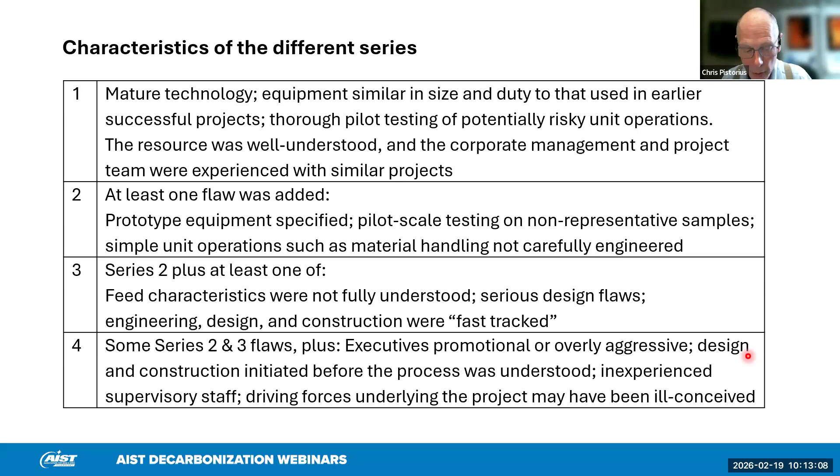This is a theoretical framework developed based on a large number of actual plants, including pyrometallurgical plants, some of which were minerals processing plants. This is a series of nickel laterite smelters, and you can see these real plants varied from series 1 to series 4 in reality. The big difference here was how mature the technology was and how much piloting was done.

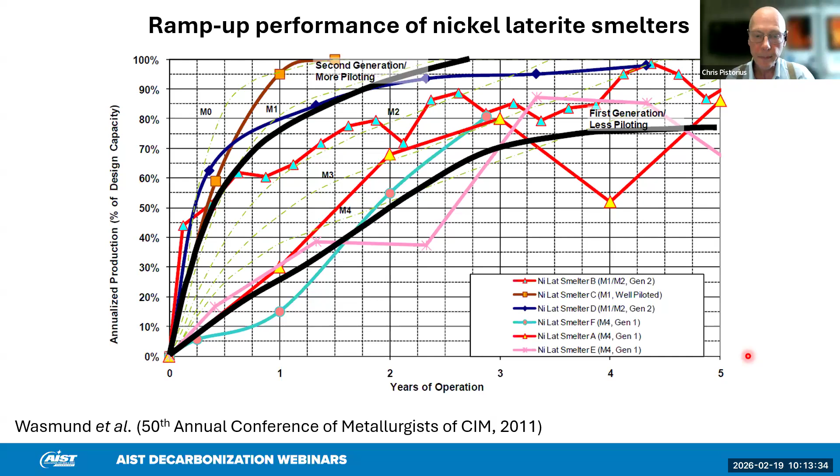So Sarah already mentioned some of these points. Hatch formulated this in terms of a very specific context of electric furnaces, and again, the same points apply: being sure this is technology that is ready, that we're moving forward with good piloting, and that all the peripherals are understood well.